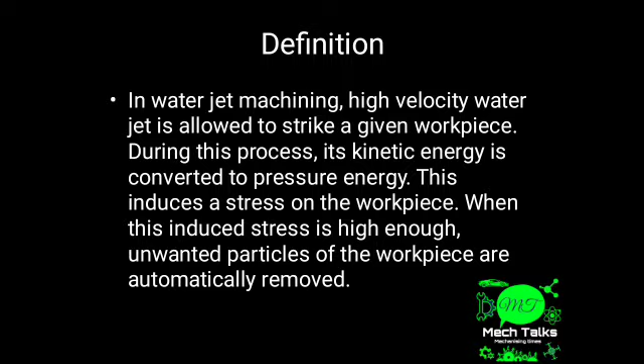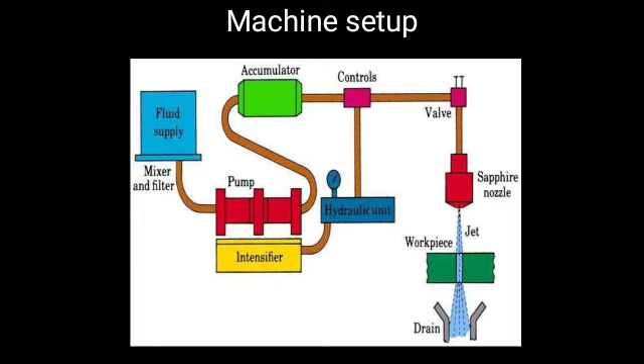So if we talk about the setup of how this machining process is done, we can see in this diagram where I'll be showing you all the parts. So here is the fluid supply, next is the pump, an accumulator, controls, a hydraulic unit, intensifier, valve, a sapphire nozzle, and from the sapphire nozzle you can observe a water jet machining the workpiece, and below the workpiece you can observe a small drain which is draining the remaining water from the water jet.

So if we talk about the construction of water jet machining, we'll be talking about the parts used in water jet machining. In the diagram I have already told you the parts' names, so let's learn about the functioning. The first one is the reservoir, which is nothing but the fluid supply, a small kind of water tank which is used to supply the water for the machining process. Next comes the pump. The pump is a device which pumps water from the water tank to the other devices so that the machining process can happen.

So the third part is the intensifier. Why do we require an intensifier? Actually, the water pressure coming out from the pump is not enough for the machining process. So to intensify the water pressure, we are using an intensifier over here.

So the fourth part is the accumulator. What is the necessity of an accumulator? Actually, the water jet velocity used is different for different materials. For example, for wood we require one kind of water jet velocity and pressure. When it comes to rubber, we require a different kind of water jet velocity and pressure. So when we vary from one material to another, we require this accumulator so that we can store and also control the pressure of the water.

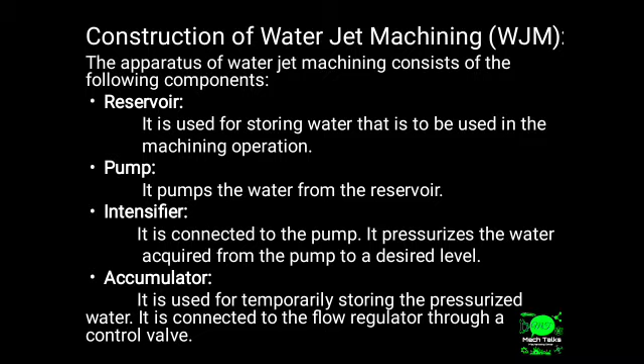This accumulator is next connected to a control valve. What does a control valve do? The control valve controls the direction and flow of the fluid, which is nothing but the water. The fifth part is the flow regulator. What does a flow regulator do? It regulates the flow of the water, meaning it regulates the pressure and also the velocity of the water inside the fluid lines. So the last part is the nozzle.

This is the most important part in the machining process, because the nozzle is a device which converts pressure energy into kinetic energy. After converting into kinetic energy, we get a high velocity water jet. So essentially, the nozzle is the most important part.

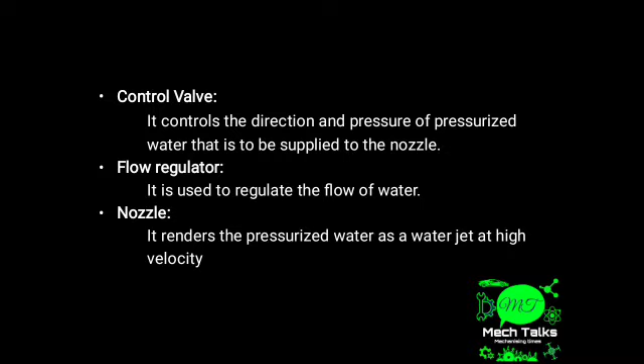So I already told you about the working of water jet machining, but I have some questions which most people ask while working on this concept. I even had these doubts. The first doubt I want to clear is: how much pressure does the intensifier provide? It pressurizes the water up to 200 to 400 megapascals. So guys, this is really a very high pressure. Next, the pressurized water is sent to the accumulator. The accumulator temporarily stores the pressurized water so that we can use it in the machining process.

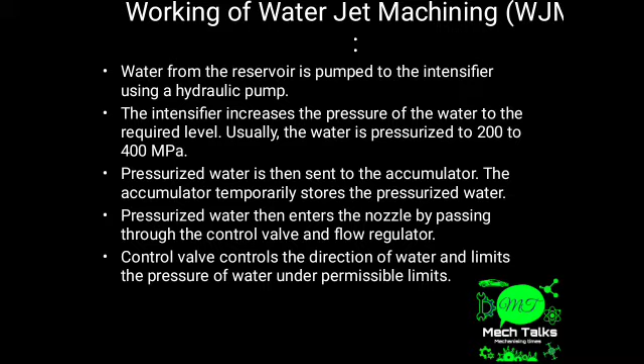So guys, I have told you about how the control valve functions, but what does it actually do? The control valve controls the direction of water and limits the pressure of water under permissible limits. So the control valve is the most important part, as it helps to control and also maintain the reliability of the machining process.

The other question which most people ask me is about the nozzle. What is the speed of the water jet coming out from the nozzle? The speed of the water jet coming out from the nozzle is nearly 900 meters per second. The next question most of them ask is about the diameter of the water jet machining nozzle. The diameter of the water jet machining nozzle is around 0.10 mm to 0.30 mm.

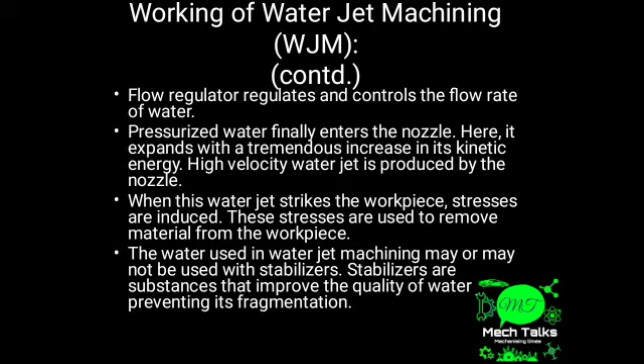So let's move on to the pros and cons of water jet machining. Water jet machining is a very high speed, very fast process. It also lessens the production time, and it prevents the formation of heat affected zones on the workpiece. It automatically cleans the surface of the workpiece, and at the same time you will have excellent precision. You can also achieve tolerances of nearly plus or minus

0.005 inches. It doesn't produce any kind of hazardous gases either, because unlike conventional machining, this unconventional machining has a lot of advantages. Hence it is regarded as an eco-friendly machining process.

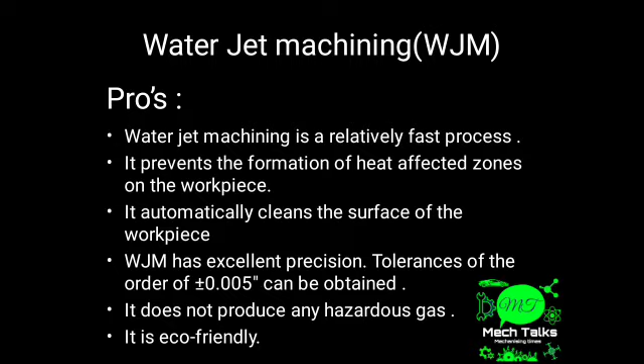So what about the cons? Water jet machining is only suitable for softer materials, and it can't cut thicker materials. So it's really difficult to use it for machining thicker metallic materials or thicker plates.

When it comes to investment, the initial investment is really high, because the hydraulic parts, the hydraulic control units and the intensifier units are really expensive, so the overall cost of the machine increases. But it is only the initial investment cost which is very high; in the long run you can achieve a very good profit from this machine.

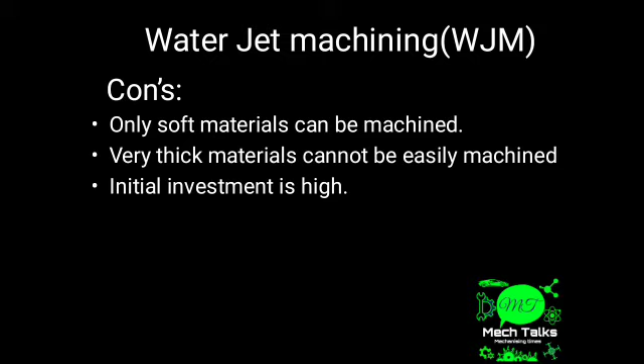When it comes to applications, water jet machining or WJM is typically used to cut softer and easy to machine materials like thin sheets and foils, non-ferrous metallic alloys, wood, textiles, honeycomb, polymers, frozen meat, leather, etc. It is also used for machining circuit boards, and it is used mostly in the food

industry, because if you use a conventional machining process in the food industry, it may affect the quality of the food, and it can be dangerous. But when we use water jet machining, since we are using water, it's not harmful, and we are going to have a very good quality food product.

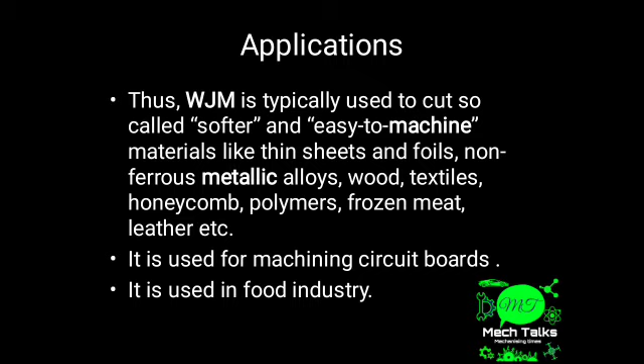So now let's see how the water jet is used for machining. This is the video I am playing. In this video you can see how the water jet is machining an aluminium plate. You can observe it's going to cut a very complex shape. You can also observe the nozzle tilting its axis. This is a 5-axis water jet machine.

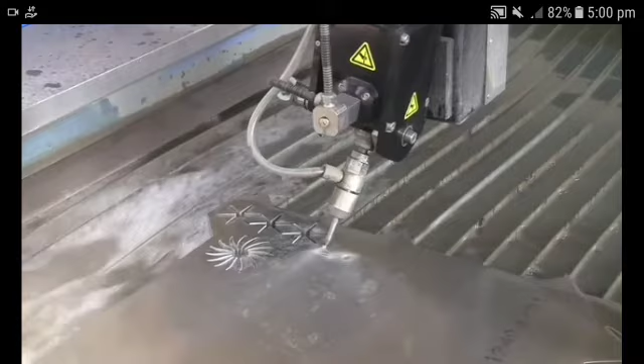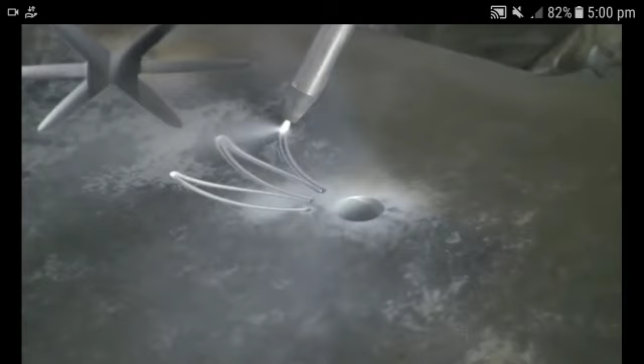And it's also a CNC machine. Most water jet machines these days are completely equipped with a CNC module, so you can take advantage of it. And if you see such a complicated part being machined here, the production time for such a product is really high if you use conventional machining.

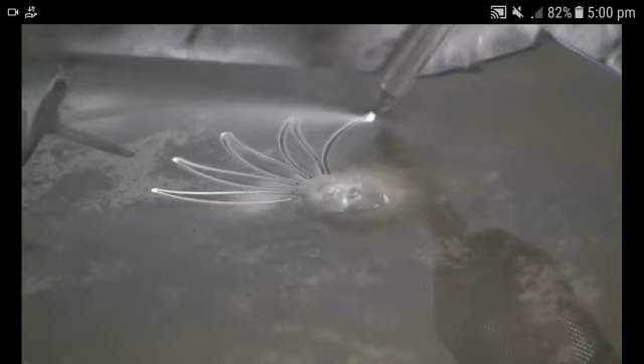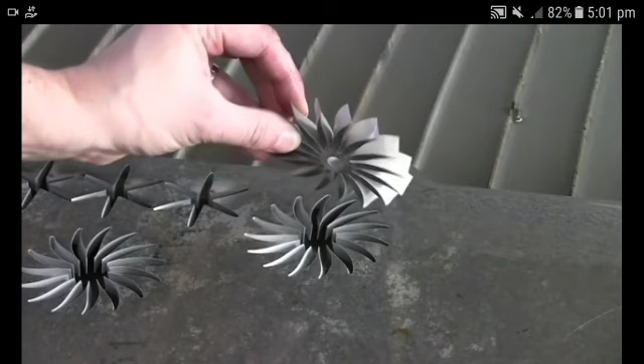But with the application of water jet machining, it is really a very good process. You can see a turbine over here, how it's being cut. See how the complicated shape of this turbine is being cut, and the material is aluminum. As I told you earlier, water jet machining can only be used for softer materials. So this is all about water jet machining.